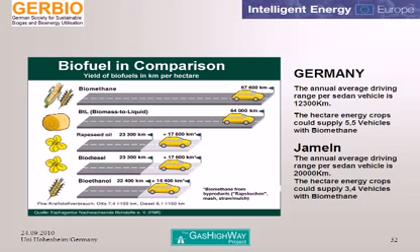So, like here, this example, Jameln, where we have our first biogas or biomethane area, the people drive more because it's in a rural area in Germany. They drive 20,000 kilometers. And that would mean 3.4 vehicles per 1 hectare of maize.

So here I have an abstract of the different biogas upgrading technologies. This is for adsorption, there's the pressure swing adsorption. Then we have absorption, there's the water scrubber. They're all scrubbers, but there's a water scrubber and there's a physical absorption and a chemical absorption. And there's one special here.

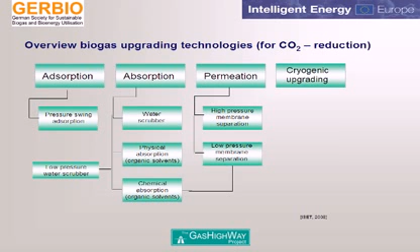I've seen this installation in India, it is a low pressure water scrubber, and I have a picture I can show you later, and it's more maintenance friendly than our water scrubbers. Then we have the membrane technology, and then the cryogenic upgrading. So I would like to show just some samples, some flow charts, and then for some of them we have even filling stations.

Here, like we said before, one of the most important is the removal of sulfur. So here we have now the pressure swing adsorption technology. Before we're coming to the actual vessels or the columns in the container or in the PSA, it's very important to get rid of the sulfur and of the water. And then we have different columns. Normally an installation will have 6, 7, 8 different columns, and they will increase the pressure in the columns, which are filled with active coal. And they will have roughly a pressure of 4 to 7 bars.

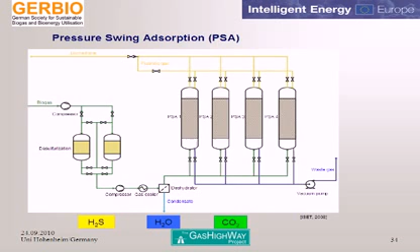And when the active coal is full, it will be regenerated in steps. And for this, we have the vacuum pumps. And so then it goes to the next column, and there are many different types on the market for the technology. So the CO2 removal is done normally in the columns. From the columns, from the vessels, the biomethane will leave, and everything is done by controls. But this is only just a small flow diagram.

To see the real installation, everything is installed in containers, and it's very, very compact. Like here, this is an installation for roughly 1,600 cubic meters of raw biogas. That means roughly 800 cubic meters of biomethane. And here we have the sulfur removal vessels. This one is a process gas storage, and this is nitrogen, for maintenance later on if there is any maintenance to be done. And this is an installation for roughly 2,000 cubic meters.

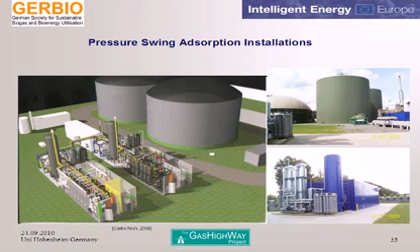But it's very compact, and all the technique is manufactured in the factory, just delivered to the site and connected. And like we have in Germany, most of them are injected into the grid. So here is one small PSA installation, and I just want to show a flow diagram here.

Normally, the substrates are entering via a scale, and then they're stored. And here, in this case, in Laupheim, which is in the southern part of Germany, near Ulm, from 350 hectares, they have roughly 20,000 cubic meters of substrate stored there for the whole year. They're using 54 tons per day for loading the biogas digesters, and they have 2 digesters and 2 second digesters, each one with 1,800 cubic meters, and 1 liquid storage tank of 2,900 cubic meters.

So from the biogas digester, like you see here, the flare, and it's very difficult to see the stirrer. The biogas goes with a temperature of roughly 45 degrees to the PSA here. But along the way, all the pipe work, all the stirrers, all the maintenance is done in a tunnel. And the tunnel is just underground, under here. So all the maintenance can be done in the tunnel. And then when the biogas is entering the PSA upgrading equipment, it's around 17 degrees Celsius.

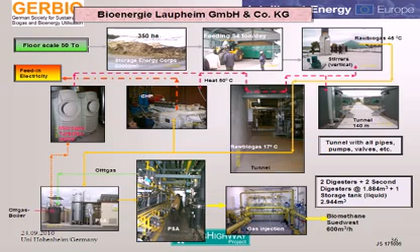Here we have the off gas, like on each upgrading equipment we have off gas or methane slip. But here the off gas is used, which has only a content of 7% methane. With 7% methane normally you can't use any burner or any engine. But there's special equipment like a microturbine, and they're using this for heating the digester. So there is no big cogeneration plant here. It's only 100 kilowatts just for producing a little bit of electricity, and some of the heat goes to the digesters.

So the next biogas upgrading equipment, one of the most popular, is the water scrubber with regeneration. So the raw biogas enters the first column, and normally in a water scrubber, you don't have to remove the H2S before the equipment. But here in this example, the CO2 and H2S, the sulfur, is discharged via these columns.

So when it comes from the biogas plant, the pressure is roughly 5 millibar, 10 millibar, and then it's compressed in stages up to 4 to 7 bars. It will depend on the manufacturer. And then you see the first gas cooler, because that is one of the most important things, to cool the gas down and to get a certain pressure.

And then from here the gas enters the scrubber, and inside it is filled with some plastic particles to increase the area for the solution to have it soluble. And then the gas goes out and goes to the gas drying system. But first it goes through the flash tank, and from the flash tank it goes back to the system, and it's all countercurrent when the water comes out.

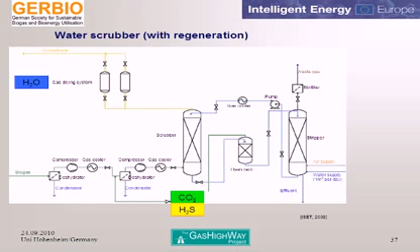And the water will be going through here and up in the system. And then air is added to it, and then it's blown off. But you see here quite a lot of cooling is done when you get the water back to the system. And it's with regeneration. So the H2O, the water, will be removed before it's entering the gas grid, or it's leaving the equipment.

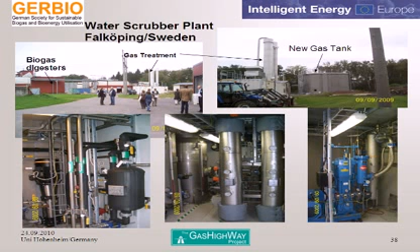So this is a small water scrubber plant in Falköping, Sweden, which is used for a natural gas vehicle station, and I will come to this a little bit later. It is on a sewage treatment plant, so they have two biogas digesters there. One is for the sewage, for the sludge, and one is for the biological waste from the 16,000 people from this village. And then they have the scrubber here, and the gas treatment here is all these scrubbers, and inside here are the compressors and the cooling equipment.

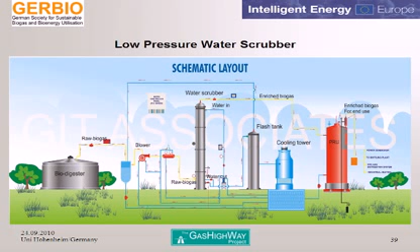Here is the low pressure water scrubber from India. I'm talking now about natural gas vehicles, but even when you want to fill gas tanks, normal cylinders, you can do it with this system too, because they found out when they're using the biogas in the household for the kitchen or for heating or for light, quite a lot of damage is done. So they're using the low pressure water scrubber, and this is a kind of process storage tank, and it can be used for different applications, even for vehicles. But then you have to increase the pressure again.

Here now is an example of the physical absorption scrubber using organic solvents. Here we have this example, Jameln, and there are 400 hectares of maize or different energy crops, and they are farmers in a certain society. They are delivering to the biogas plant, and part of the biogas goes to the cogeneration plant, getting the heat for the heating system, and the other part is going to the electrical grid.

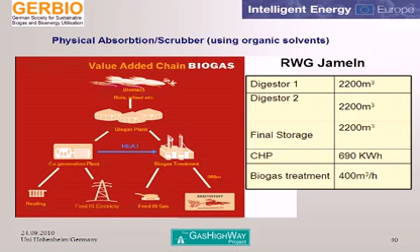And then, like we had before with the PSA and the water scrubber, we need only electricity, the electricity we need for cooling and for the compressors. But here the system is using some of the heat for the process of upgrading the biogas. So we have 400 cubic meters of biogas entering this upgrading equipment, the physical absorption scrubber, and 100 cubic meters is going, like you can see here, to the car and the vehicle for natural gas vehicles, and the other 300 cubic meters is going to the gas grid.

Here we can see the physical absorption scrubber. It's, in principle, the same as the water scrubber before. It's only that we have here a heating system in it for heating up the solvent, the organic solution. And the CO2, sulfur removal and water removal is done in the same kind of scrubbers. And you can see here we have cooling, and here's the compressor.

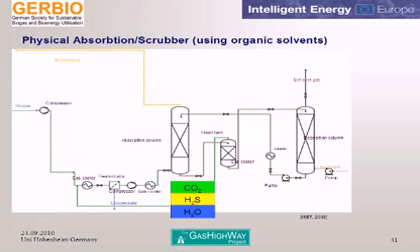So what is very important in this system, you have to have a certain pressure and a certain temperature. And normally when the gas comes, it's very humid, so the condensate has to get out. But here with the physical absorber, everything is done at one stage. And in the new installations, most of this, like the sulfur removal and the water, is done before or outside the container or containers.

So here in Jameln, the biomethane technology has a biogas upgrader, and it has to be done according to German standard, the G260 and 262. That is normally for all German biogas upgrading. And it has to be done to DIN 51624. This is a German standard for natural gas for vehicles, because the sulfur content must be a little bit lower, like 5 parts per million. In the German standard for the upgrading, it's a little bit higher.

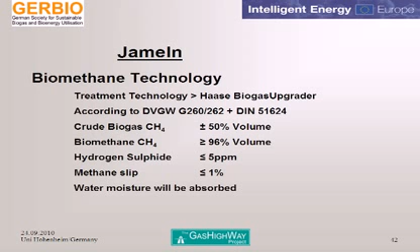So when the crude biogas is entering, it's roughly 50%, because it's using energy crops, and hydrogen sulfide is less than 5 parts per million, and the methane slip is 1%, and the water moisture will be absorbed.

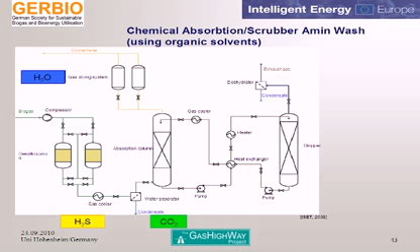So the next one is getting more and more popular, because it's using quite a lot of heat. It is a water scrubber again, chemical absorption. You see from the layout it's roughly the same, but here we have the sulfur removal before, which is very important because we operate the solution with a temperature of roughly 180 degrees Celsius. And there's not much energy used. I have a table later, you can see the difference. And there are pressures and cooling systems and heating systems.

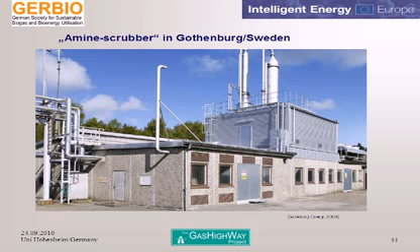This is a typical example of one of the biggest amine scrubbers, in Göteborg, Sweden. And you will see all the time these vertical pipes or columns coming out of the building or near the building.

Here we have now a technology, membrane biogas upgrading, and this is one of the biggest installations, and it is getting popular. I will show you the filling station in Austria, but it's a very small one. But here it is roughly 250 norm cubic meters of biogas entering the cooling and drying plant. And here is the sulfur removal.

So what they're trying to do is the cooling or the drying of the water, because the humidity of the biogas is roughly 100%. And then we have here the compressor. It's entering here with 6.5 millibars, and then with the compressor it's up to 6 bars. And then it goes through the active coal filter, and then up to the first upgrading step, and then to the second one.

And here particularly you can see quite well, like in every installation, one of the very important issues we have when it comes to biogas upgrading is the methane slip. What are we doing with the methane slip? Now technologies are developed, like the micro turbine you saw before, and many different technologies and special burners where you can use the 7% of methane for heating the fermenter.

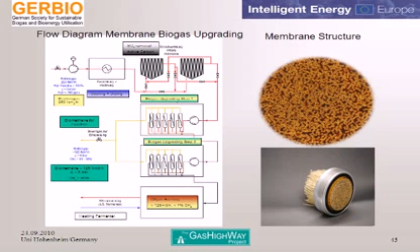These are the membranes. Like you see, it's a small membrane, and there are thousands of small membranes, and the biogas is entering and separating the CO2 and the CH4.

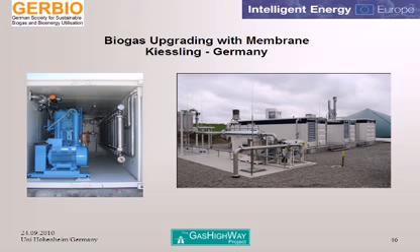So this is a relatively new installation, a first big installation. There were small installations done in Austria, and I have some pictures from it. Maybe you can't see it too much on this picture, but when you compare a PSA installation and an installation with a membrane, the pipe work looks much simpler. So the membrane technology is really coming.

And there are several steps. There are few installations done, and it is not very popular in Germany because we have gas pipelines everywhere. But in countries like Australia, America, and Sweden, where they don't have a system of gas pipelines, the liquid or cryogenic biogas upgrading looks to me like a future possibility.

But everywhere you read about it, it is very expensive. It's consuming quite a lot of energy, and I can't prove it. I haven't really any experience, but I have met these people, and I would like to see it a little bit further. Because the liquefied biogas would be of particular interest for vehicles.

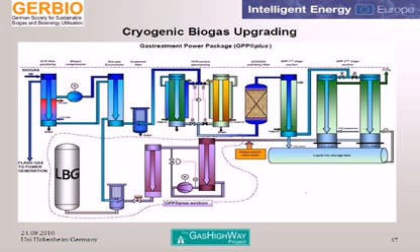And the advantage is with 1 cubic meter of liquefied biogas, you can drive quite a long distance, and you can store it and transport it much easier. And here in this case, they're even using the liquefied CO2. And the CO2 is used for cooling and for greenhouses.

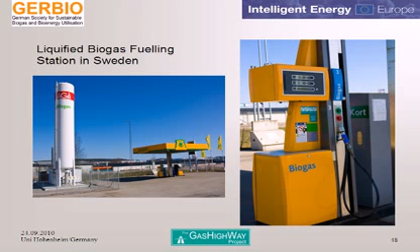So this is one of the first liquefied biogas filling stations in Sweden. And you can see this huge tank. It's now used only for heavy duty trucks, but it's getting more popular. In Germany, nobody wants to talk about it, because even when you look on the German map, there is no terminal where you get liquefied gases from Qatar or Indonesia, because we have our industry who likes to install pipes.

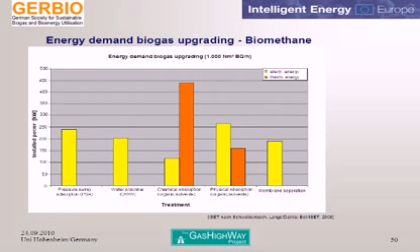And here you see in the water scrubber, it's less, only 200 kilowatt. And here, with the chemical absorption, or the amine scrubber, we have quite a lot of heat. Remember, we need a temperature around 160 to 180 degrees, and a little bit of electricity. For the physical absorber, we need heat and electricity. And for the membrane technology, it's less than 200 kilowatt. There's no table yet for the cryogenic installation.

And now, in the German law, the methane slip goes down from 1% to 0.5%. That will make it more expensive, or not so much more expensive, but we have to find different technologies.

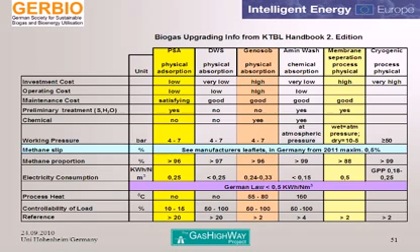And here it gives you the different loads, how to control it, and here are the references of these installations. As you can see, the PSA and the water scrubber have roughly 20 installations each in Germany. So in Germany we have around 40, 50 installations if you add them all together. That was up to last year, 2009. So we will see which technology will be advancing.

So the cost for the biogas upgrading equipment is roughly 1.2 to 1.5 million euro for 1,000 norm cubic meters of raw biogas. And for 250 norm cubic meters, which is a quarter, the cost is roughly 0.5 to 0.8 million euro. That is because of the gas injection and all the controls. If you used it only for vehicles, the price would change because we don't need the injection.

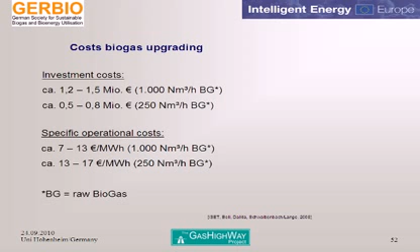So the specific operational cost is 7 to 13 euro per megawatt. So it's 0.7 to 1.3 cents per norm cubic meter. Then you can calculate it even for a kilowatt. And 13 to 17 euro for 250 norm cubic meters.

Okay, just want to show some of the installation of the different ideas. Like in Germany, like you saw, we have this big piping system, 440,000 kilometers of pipeline. So a filling station is just connected near to a gas pipeline, and then we need the compressor.

But in Sweden, like you have seen the picture before, here's a town of 16,000 inhabitants, Falköping. So there's a sewage treatment plant. All the sludges goes to a biogas digester. They have one biogas digester for the sludge and one for the solid waste. And then they're using the water scrubber, treating it to their standard, roughly the same like the German standard, just with different letters in front.

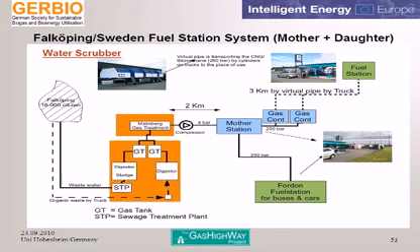And then they're transporting the gas over a distance of 2 kilometers to a filling station. In this filling station, they compress the gas and use it directly there. And then they have a system, like you can see the truck here on top, discharging the gas into trucks or containers and bringing it to the next filling station because there is no gas grid. This is what they call a mother and daughter installation.

So here is one of the installations. This is the mother station here with the compressor, and here the dispenser, and then they're transporting it to the different daughters. It can be in a radius of 50 to 100 kilometers.

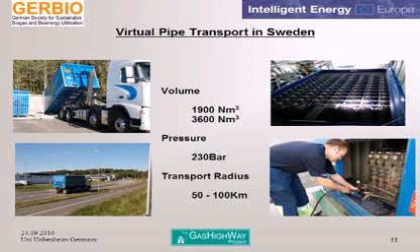And in Sweden, they sell their gas by cubic meters or liters. So you can see here the truck is going to the station, just discharging it, and then they're connecting it for the other filling. The prices in Sweden for natural gas is nearly the same as normal filling, not like in Germany where we have half the cost. And here even a bus can use it.

Here is another small one, like the leaflet I gave you from Finland, a small biomethane filling station on a farm. These people from Metener who did this installation, some of them are even coming next week to the study tour. But they're coming here just to see - they don't want to sell their equipment to Germany because Germany is too complicated for them, because of all this injection and TÜV regulations and whatever.

So here they have a biogas plant in a farming community very far from the next town, 40 to 50 kilometers. But luckily, near the farm there is a sweet company, so they're taking all the bio-waste from the sweet company and producing, last year, enough for 15 vehicles - I think they have more now. The water scrubber is only for 50 cubic meters, and this is the whole scrubber. In Germany, nobody believes you can get equipment so small.

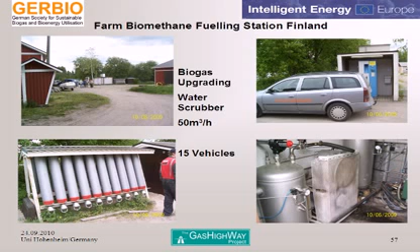But it can be done if the industry isn't behind it - if it's the farmers and the university from Jyväskylä doing this, it's very promising. And the price is roughly 300,000 euros.

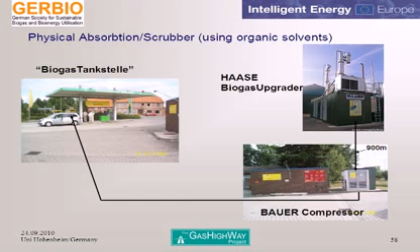Here we're coming back to the Jameln biogas plant, where we have biogas upgrading equipment, just 900 meters from the compressor or filling station, and then from the filling station it goes to the dispenser and then to vehicles.

And these farmers are still investing money in it, even though it doesn't add up, because when you go to the German filling station, the price for natural gas per kilowatt hour is only 5.5 cents.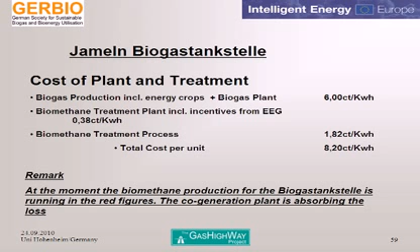But they've done it for other reasons. Because near their farm in Jameln, there is supposed to be the storage place for all our nuclear waste. And they're demonstrating all the time, saying we want to do something different - we don't need this nuclear power, we would like to have renewable energy. And so the farmers even pay for it themselves.

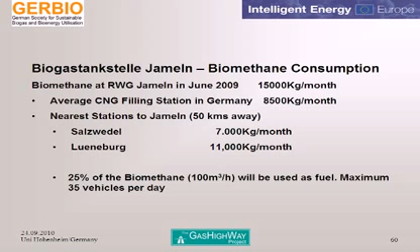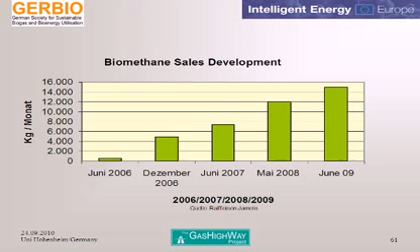For this station, in Germany a filling station has 8,500 kilograms per month. But in Jameln, it's double the amount because the people are behind and they have many more vehicles. I want to show you the sales. That was even one of the first biogas upgrading plants in Germany. It went up to 2009, up to 15,000, and I think they are now over 22,000 kilograms per month.

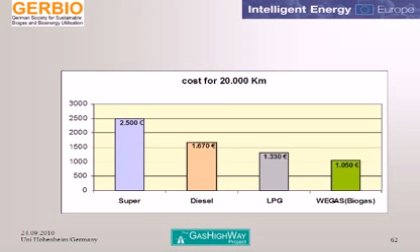Cost of driving a vehicle 20,000 kilometers: using super petrol is 2,500 euro, diesel is 1,670, LPG is 1,330, and using biogas or WEGAS is 1,050 or 80 euro. So there is a cost saving of nearly 50%.

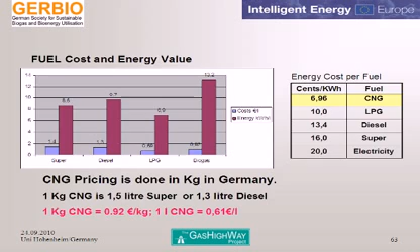In Germany, we sell our CNG in kilograms, not in kilowatts. In comparison to a liter of petrol, our gas is only 61 cents compared to 1.4 euro. So there's quite a lot of saving, and the government is promising not to put too much taxes on it.

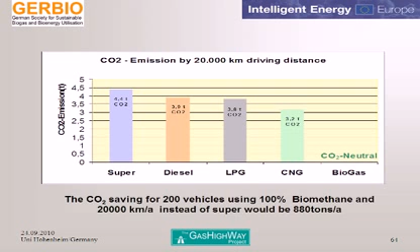Here is the emission when using, like in Jameln, we have 100% biomethane. So the CO2 savings for the vehicle for 20,000 kilometers would be quite a lot. It is, as you can see, neutral here. When using super petrol we have 4.4 tons, and 3.9 tons for diesel, LPG 3.8. So the saving would be roughly 4.4 tons per vehicle. And if you have more than 200 vehicles or 2,000, you can multiply this and find the CO2 savings.

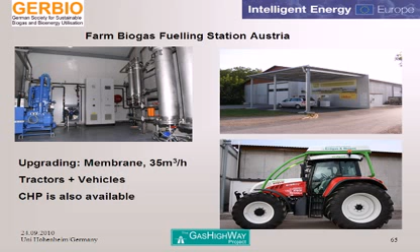Here it is a small farming installation. It seems like the farmers have done this small upgrading plant with a membrane. Like the big one is the compressor, and here you have the membranes. They're using it even for tractors and for the whole vehicles, and they have a dual fuel engine here, diesel and biomethane.

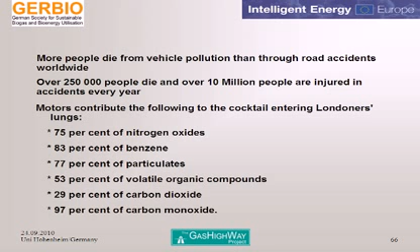I want to remind you, and I think it's a very important issue, when we're talking about vehicles we have to talk about accidents, and we have to talk about air pollution. Here you see that every year more than 250,000 people die because of car accidents, and over 10 million people are injured. The motors, the engines, are contributing to the cocktail entering the Londoners' lungs, and I think they have closed down part of London city for this reason. So introducing more garbage trucks and more buses with biomethane would help quite a lot with the health issue.

So the advantages when using CNG and biomethane as a fuel: CO2 reduction of 25 to 85%. If you use biomethane, it depends on the mixture of substrates you're using, and it can be much, much higher than 100%. NOx reduction is up to 95%. No soot particles, no smoke, no filling emission - when you fill the gas into your natural gas vehicle, you don't smell anything.

The CNG and biomethane can be directly supplied from the gas grid. Lower fuel cost, independent of overseas supply. I think that's a very important issue too - independence.

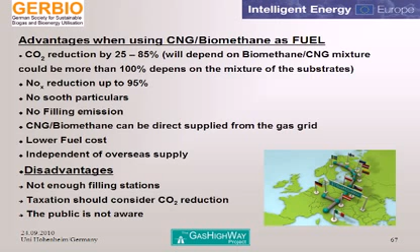The disadvantages: not enough filling stations. This is what people very often complain about, or they have to wait more than 4 minutes to fill their vehicle. And the taxation here in Europe is not really considering CO2 reduction in vehicles. They're giving guidelines, but I think that will come if you have the benefit of the CO2 reduction. And the public is not aware - like in Germany, it's very seldom that people know about it. Even when you go to a Volkswagen dealer or a BMW dealer, they don't know anything about it. They're not trained in it, even in our training schools. And that is part of our project, that we're trying to make more public awareness.